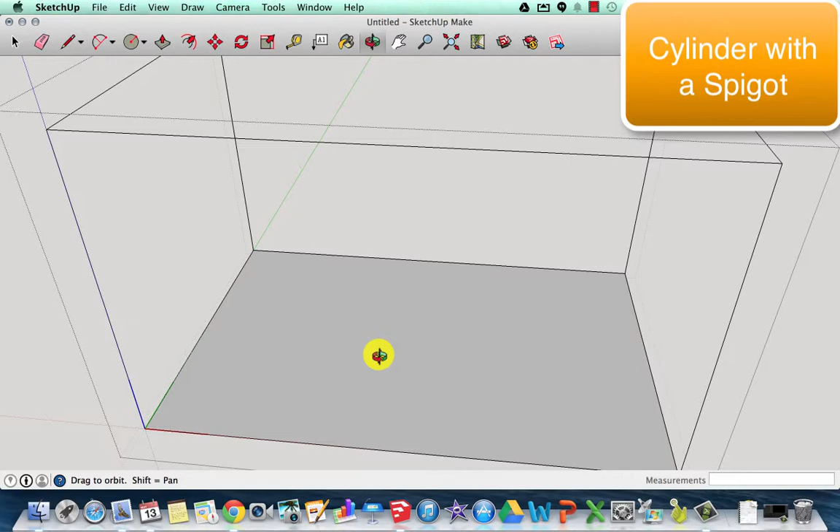Alright, so today we're going to create a cylinder with a spigot in Google SketchUp.

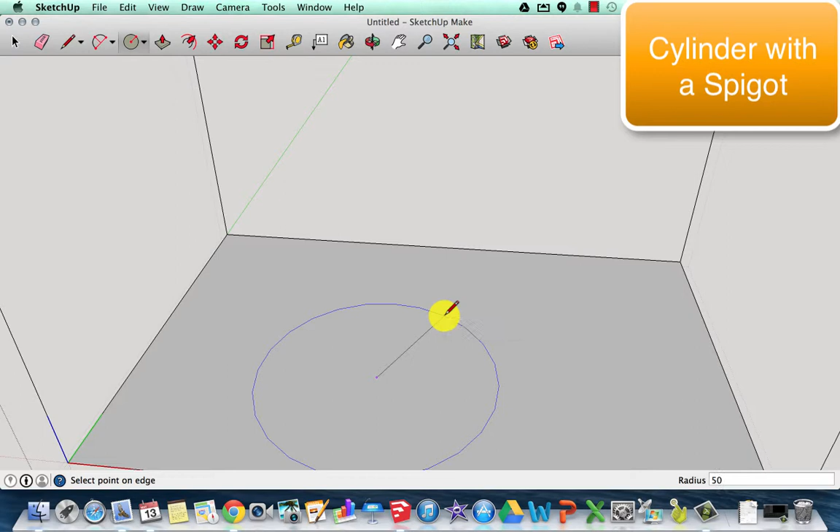We'll get into SketchUp and select the circle tool. If it's not a circle, you can hit the drop down and change it. From the base, we'll click and drag it out. Notice it's tough to get it precisely 50 millimeters, so as I'm clicking and holding, I can type in 50 and hit enter, and it will lock me in at a 50 millimeter cylinder circle.

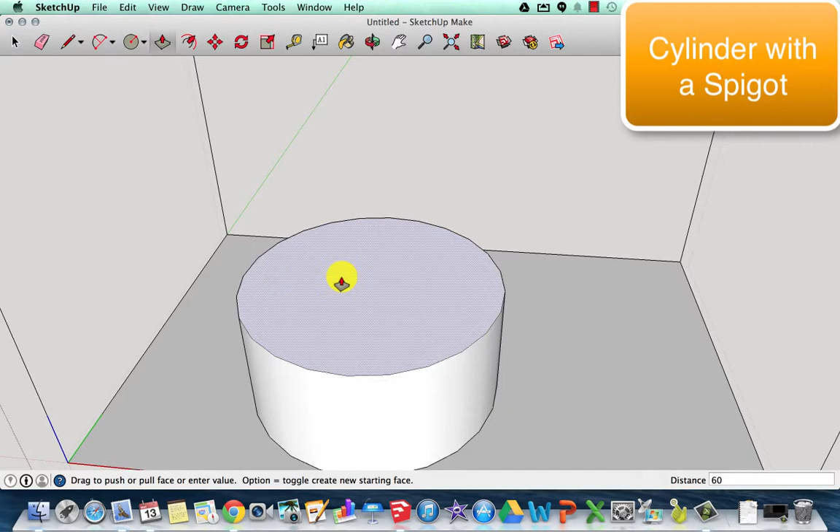Now I'm going to pull the face up, and again I can't get it as precise as I want. So I'll type in 60 millimeters, but that's not enough, so I keep going. I can keep pulling it up—notice it starts over, so I know I've got 60 millimeters invested already. I type in 80 more for a total of 140 millimeter tall cylinder.

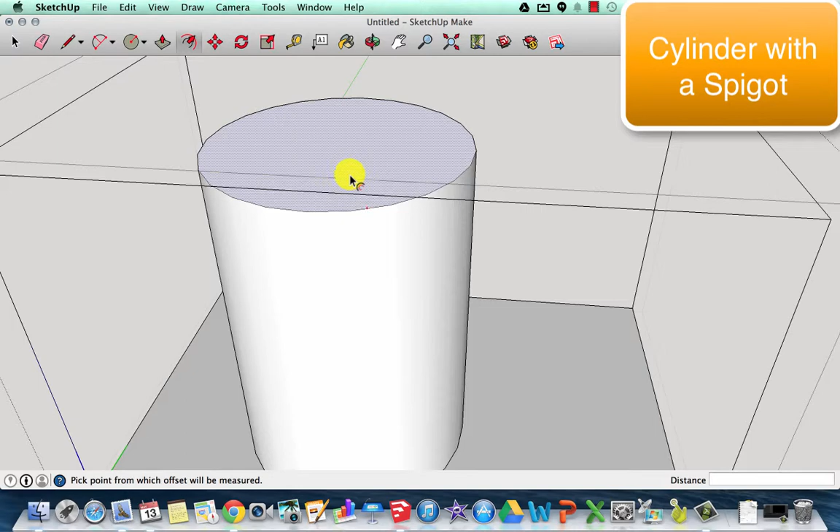That doesn't really do much for me because it's all closed in. What I can do is scale it out, taking from one of the edges. Not too far—you don't want to use too much material, make it too thick, especially for this project. So I'll have it be 2 millimeters thick.

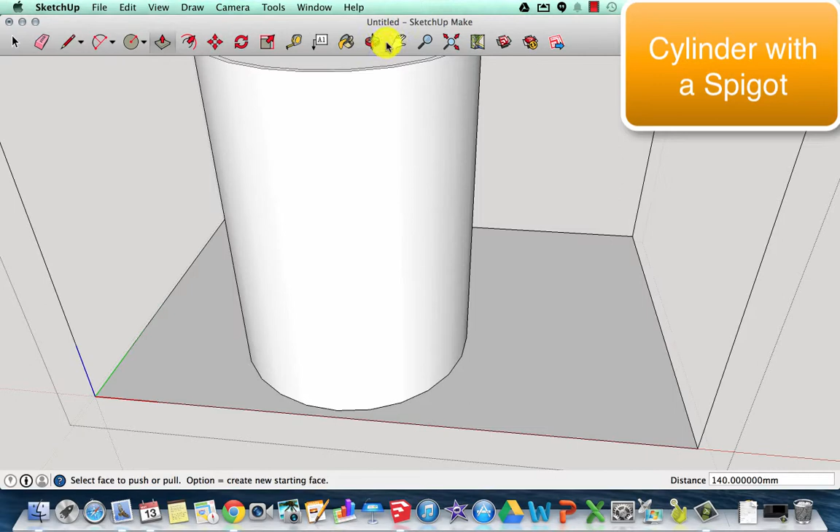Now I want to pull this down to fit around the cylinder. So I've got the height of the cylinder as 140 millimeters, and the exterior is simply 2 millimeters thick. I'll select and delete out that top, so now it's hollow, if you take a look and spin it around.

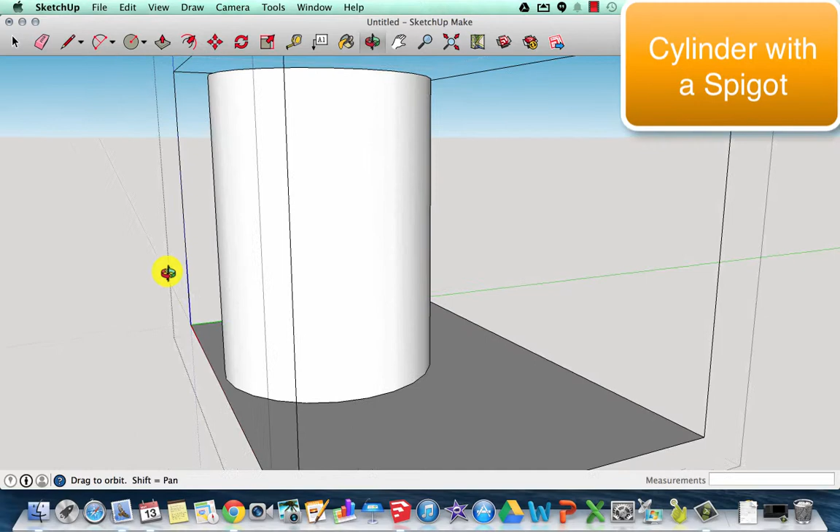The next thing we need to take care of is building a spigot onto the bottom of the tank, so I'm spinning it around to make it ideal for us to build. Now if I take a pencil and drag it out, that doesn't really help a whole lot—it'll get me a line, but what I really want is to build another cylinder coming off of it. So I'll click on the circle.

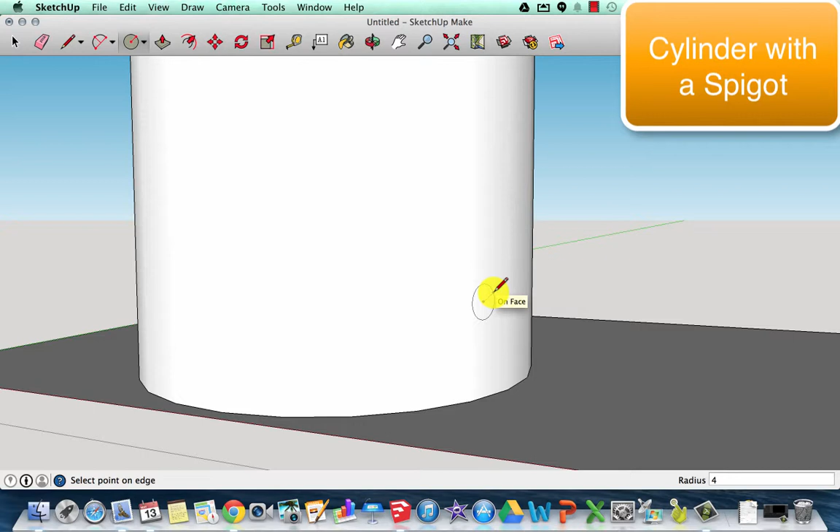On the face, I'll type it out to be 4 millimeters wide, and I'll scale it out so it'll be 2 millimeters thick. I want to have some sort of thickness there, otherwise it'll get too flimsy and be real easy to break.

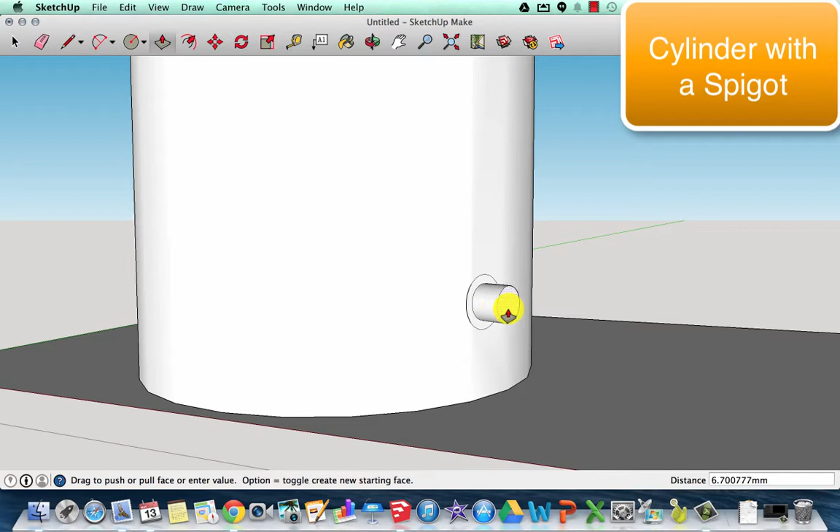So I'll take the cylinder and extend it out. I'm going to end up extending it out 25 millimeters, just to give the water a little bit of place to travel.

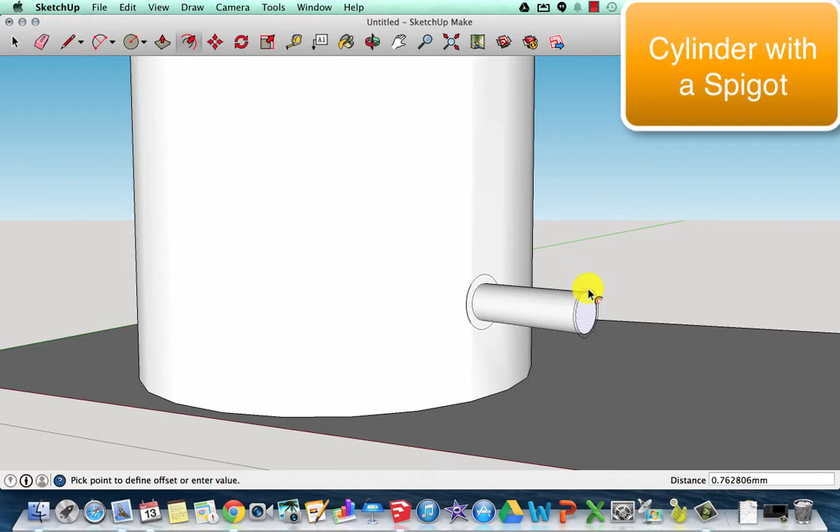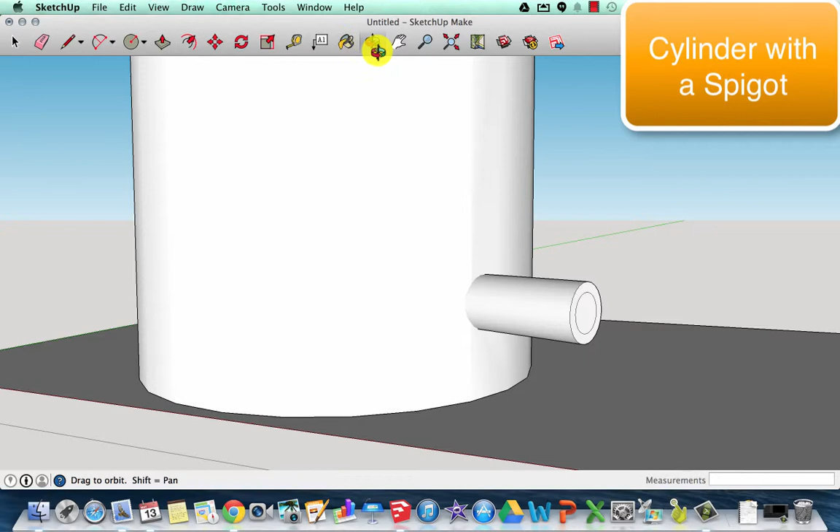One thing we're going to notice is that when we were trying to extend out the thickness here, it wasn't working. So I can delete it, and actually pull it back, going from the end to the beginning. Now that's creating a thickness on the cylinder, on the spigot. I'll rotate around, and since I don't want it to be capped, I'll delete that there.

I need to check to make sure the other side is also clear—it doesn't have any structure on it, so I'll have to navigate a little bit around. Notice we've got it protruding a little bit; that's fine.

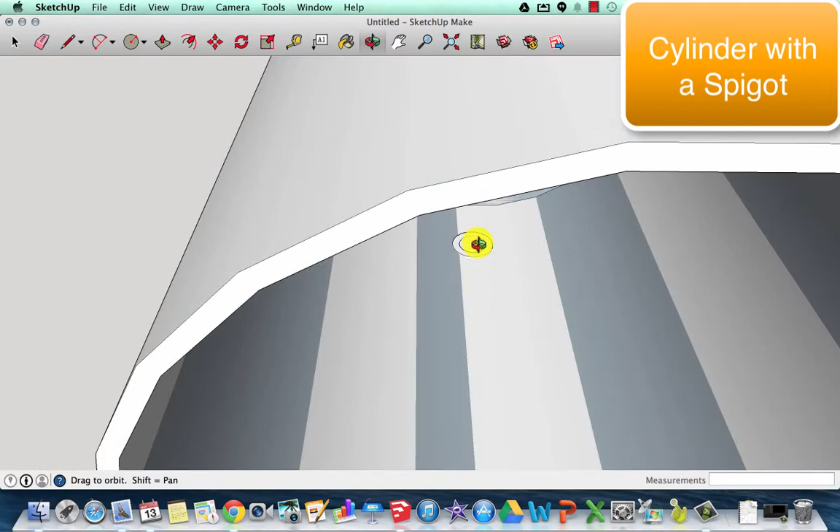Here, notice that if I select that circle, it's selecting everything on the interior. So what I want to do is create another circle and delete that piece—basically telling SketchUp that I want to delete a certain piece. To make it easy, I'll take the pencil, go across the diameter, and then using the circle tool, start at the midpoint and build a circle going out.

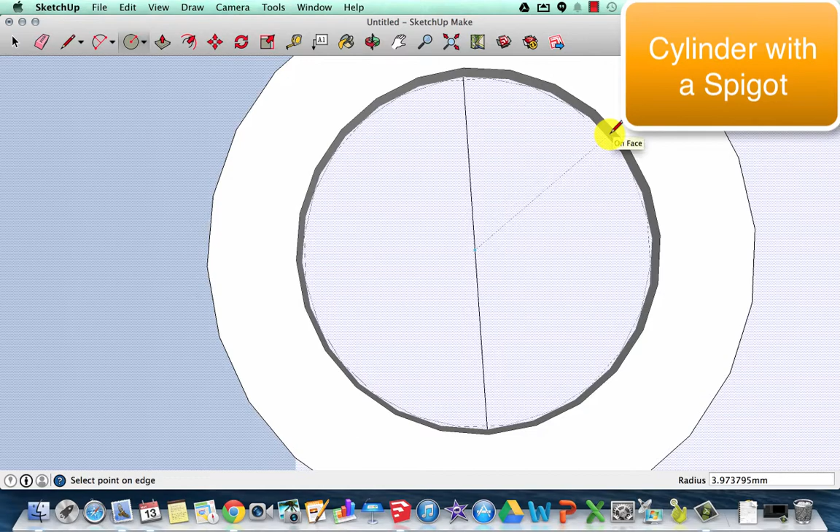Now it's not going to be flush, not perfect, but it will get us the diameter that we need. So now I've got a circle, and I can delete the pieces. All of a sudden you see the light through. I can delete these extra lines coming in, and I've got myself a cylinder with a spigot attached.

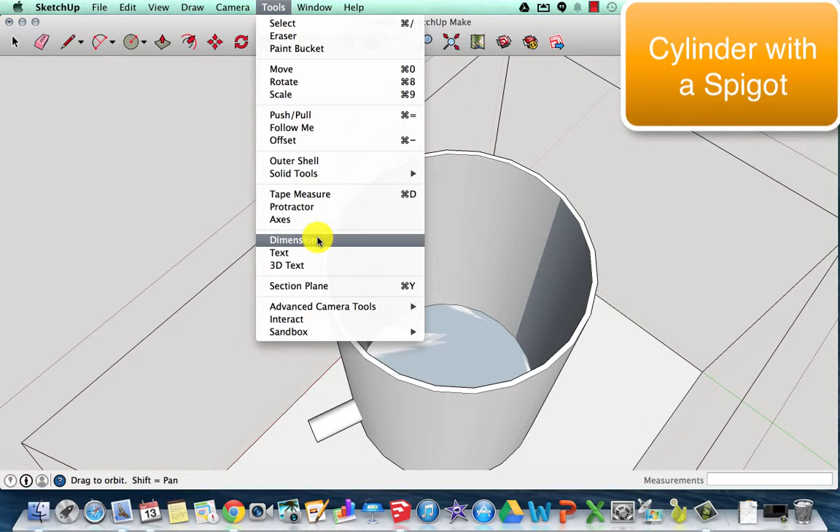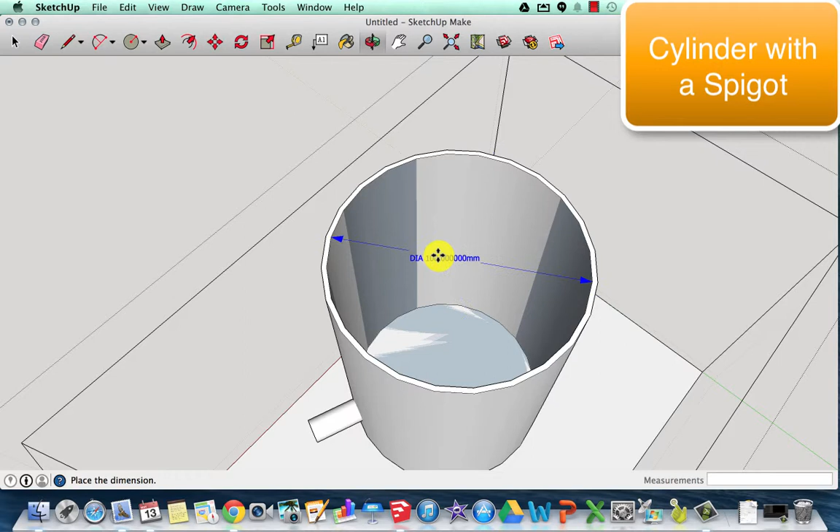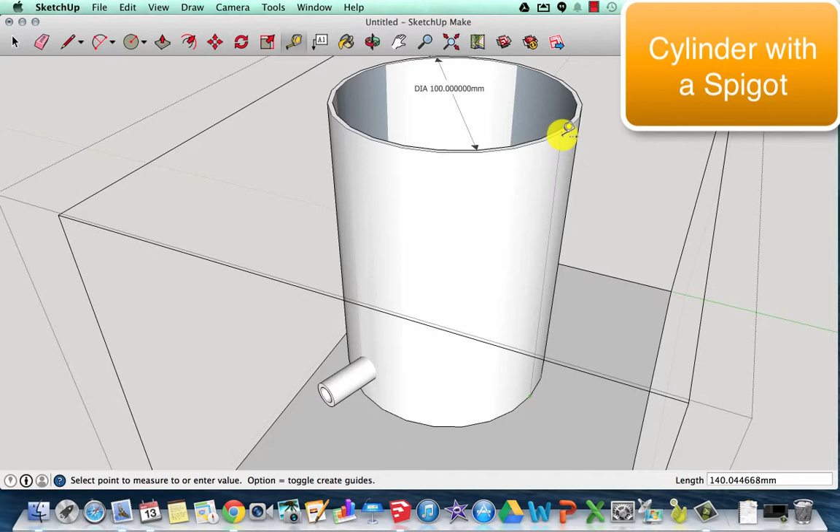Taking a look, just making sure everything looks good, and I want to make sure the dimensions are appropriate. So I'm looking for the diameter of the tank to be 140 millimeters—sorry, 100 millimeters was the diameter of the tank, and we'll take care of that. The next piece is we need to find the height of the tank.

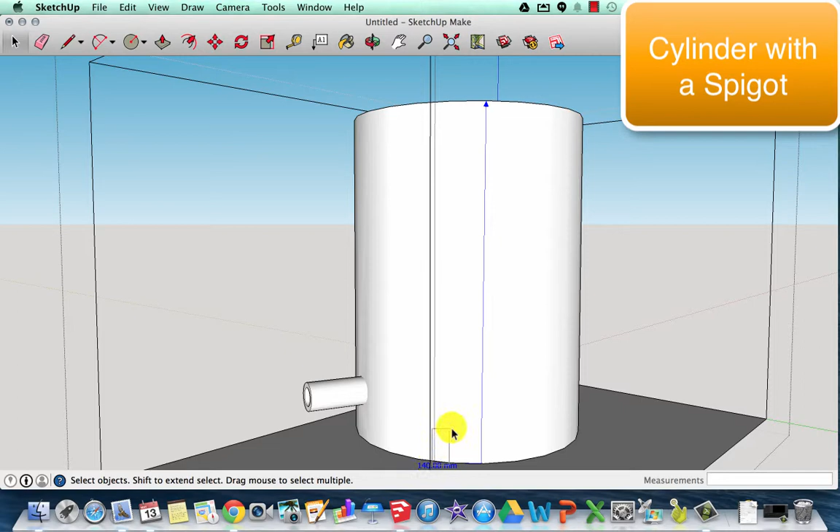And sure enough it is 140 millimeters, so we're good. And we have the text tool to where I can add it and type in 140 millimeters, so that way my final product, when it's ready to send for printing, now shows 140 millimeters tall and 100 millimeters thick.

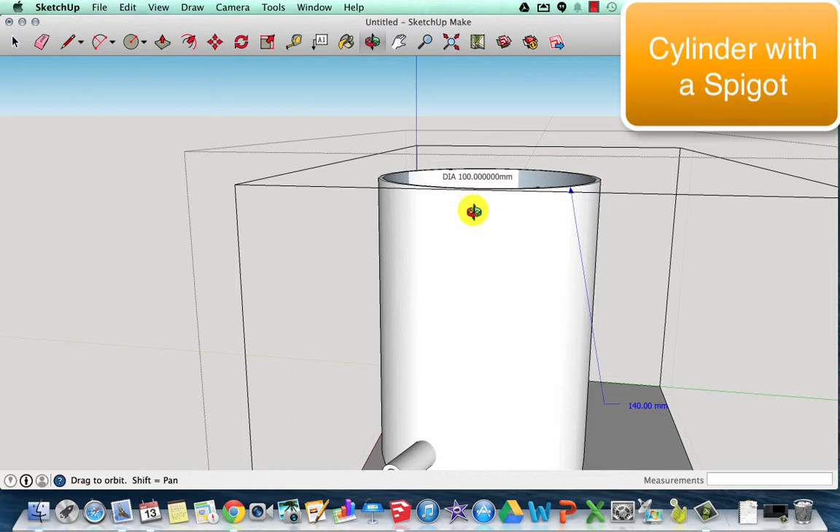I'll just clean this up a little bit, move it so that it's easier to see. And there you have it, a cylinder with a spigot. Hopefully this helps, and good luck.